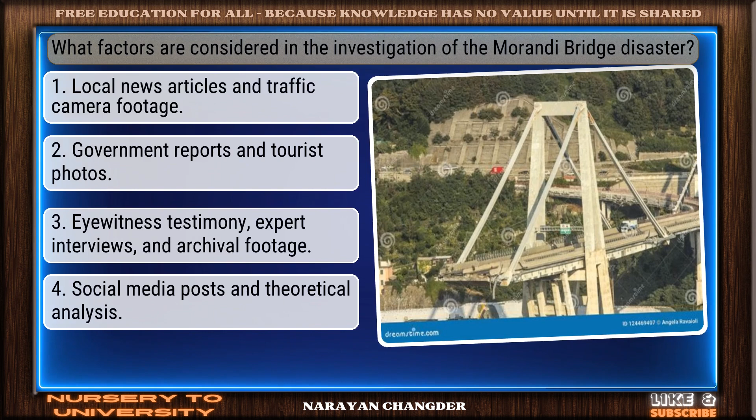What factors are considered in the investigation of the Morandi Bridge disaster? Valid point. Eyewitness testimony, expert interviews, and archival footage is true.

A structure built over something so people can cross. Smart move. Bridge is an accurate answer.

Which bridge is known for its ability to handle earthquakes due to its design? Solid response. Golden Gate Bridge is a valid choice.

How long had the Morandi Bridge withstood use before its collapse? Well picked. 50 years is the correct answer.

What kind of concrete was used in the design and build of the Morandi Bridge? Nice work. You chose prestressed and it is correct.

What is a common method for inspecting the structural integrity of a bridge? Excellent. Visual inspection is a brilliant choice.

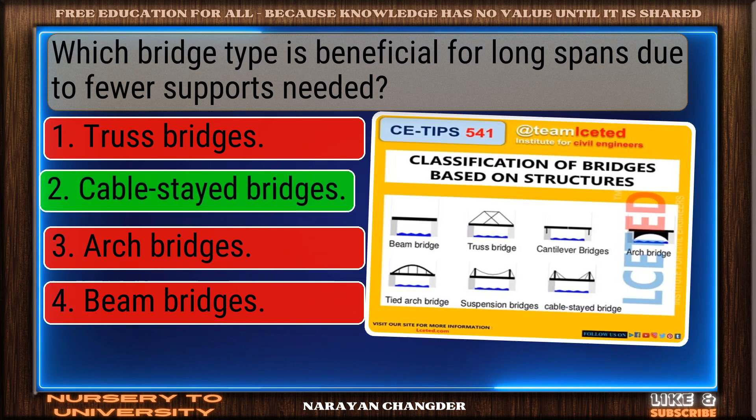Which bridge type is beneficial for long spans due to fewer supports needed? Great job. Cable-stayed bridges is the accurate answer.

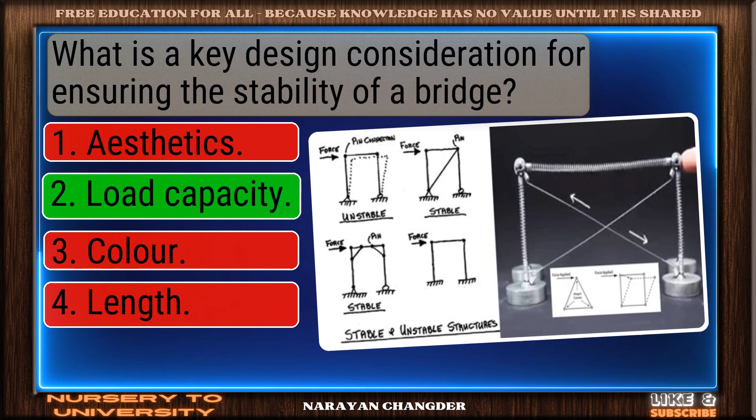What is a key design consideration for ensuring the stability of a bridge? You chose load capacity, and it is correct.

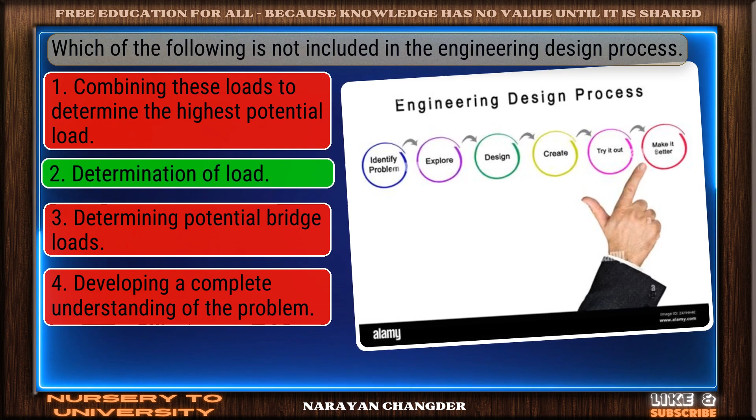Which of the following is not included in the engineering design process? Right choice. Determination of load is the best answer.

What is the primary role of a structural engineer in bridge construction? You got it, your choice. To specialize in designing structures that resist loads is right.

Which type of bridge is known for its simplicity and cost-effectiveness? Good job. Your answer, beam bridge, works well here.

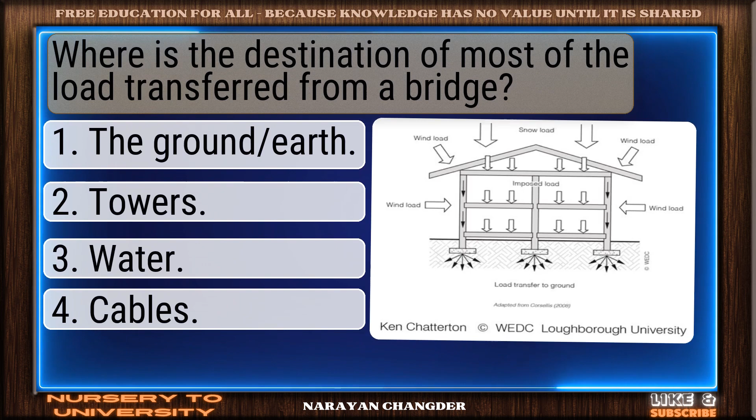Where is the destination of most of the load transferred from a bridge? Good thinking. The ground, earth, is the right answer.

Which bridge is known as a hybrid of suspension and cable-stayed types? Well done. Brooklyn Bridge is the right choice.

What makes the Golden Gate Bridge particularly suited to its location? You're right. Its ability to withstand earthquakes is the correct answer.

What is the strongest geometric shape according to bridge engineering? Right again. Triangle is a valid answer.

Why might an engineer recommend reducing the load a bridge can carry? Great thinking. To ensure safety is the right choice.

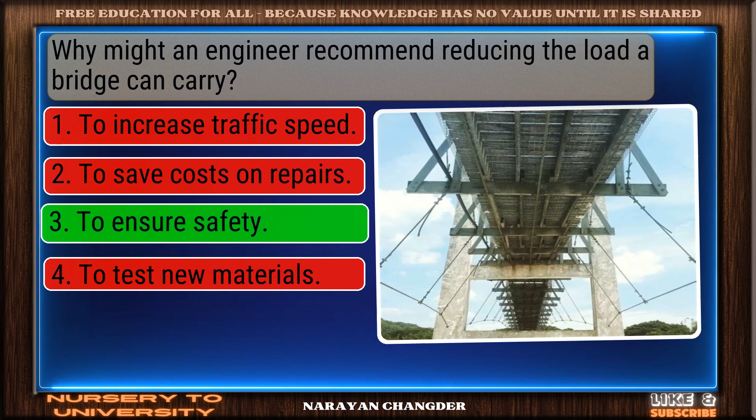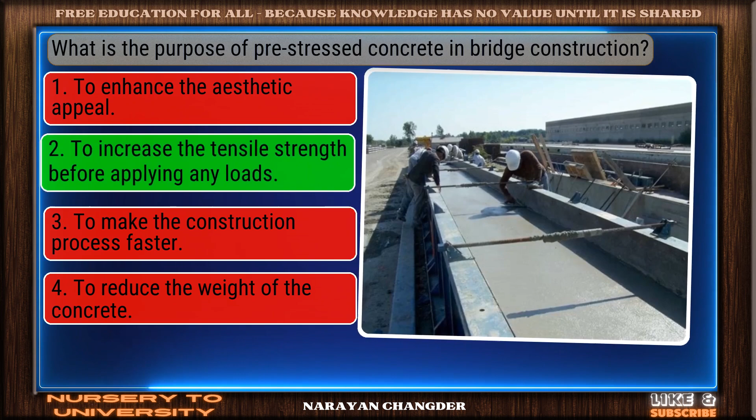What is the purpose of pre-stressed concrete in bridge construction? Bravo! To increase the tensile strength before applying any loads is the answer.

What is the title of the second video presented in the discussion? Correct. 'What Makes Bridges So Strong?'

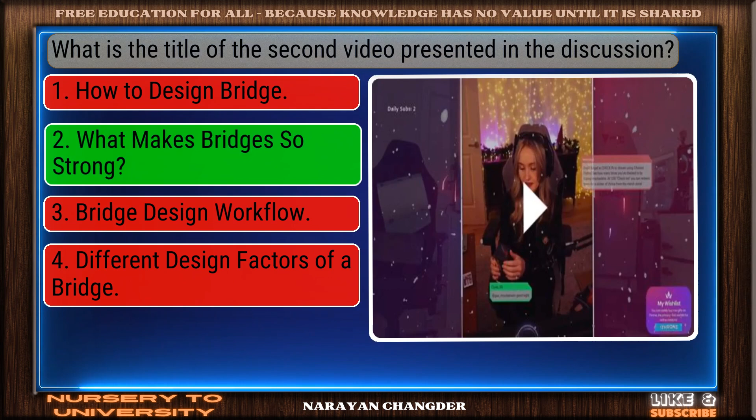What material is often used for the cables in a suspension bridge? Clear logic. Your choice, steel, is sound and 100% true.

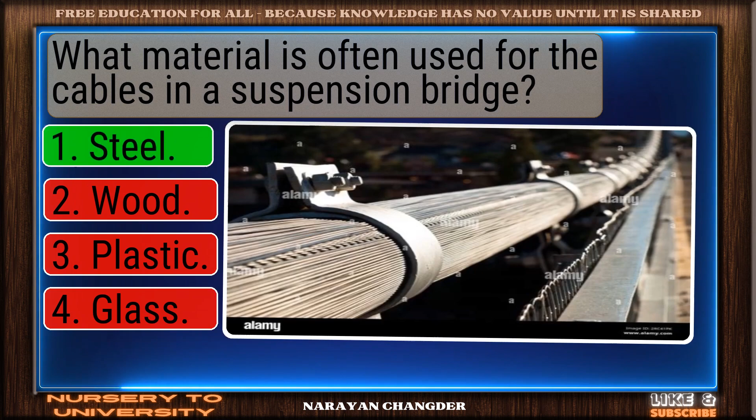To provide step-by-step procedures for the building of the bridge. Correct response. Construction design is the most accurate answer.

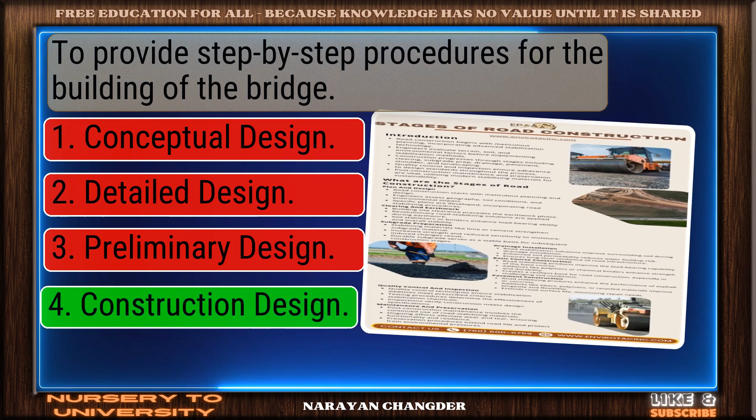Ratio of side span to main span in suspension bridge varies between what values? On track, 0.17 to 0.50 is the correct answer.

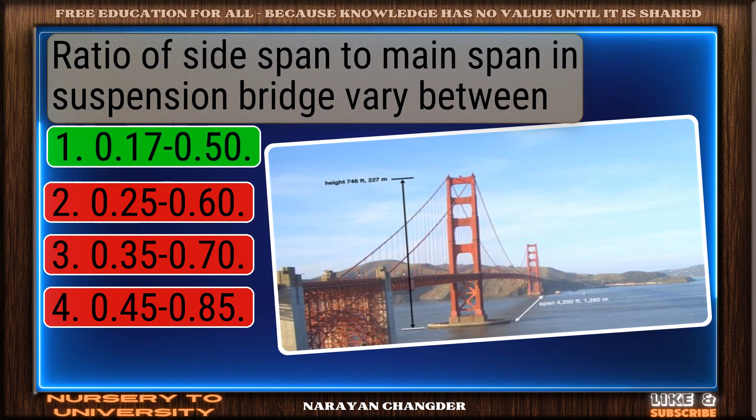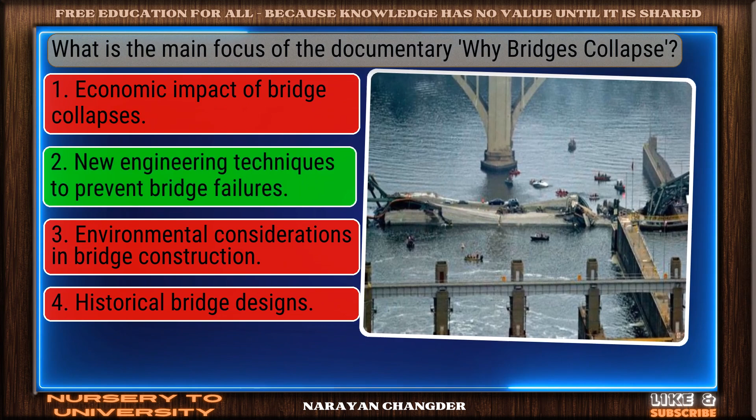What is the main focus of the documentary? Why bridges collapse. Well done. New engineering techniques to prevent bridge failures is the right choice.

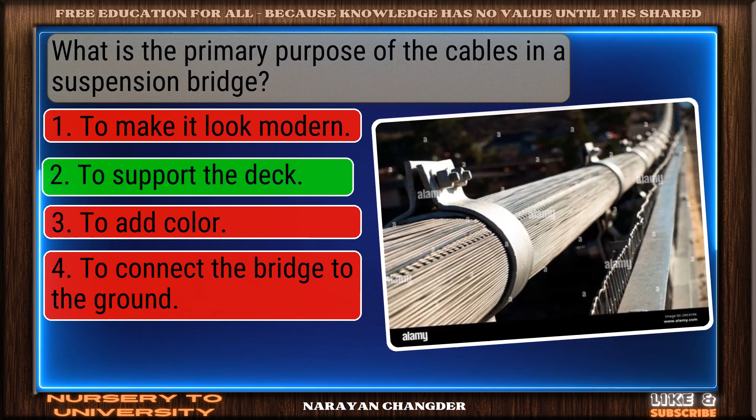What is the primary purpose of the cables in a suspension bridge? Great thinking. To support the deck is the right choice.

Which type of bridge has towers at either end that hold cables? Good thinking. Suspension bridge is the right answer.

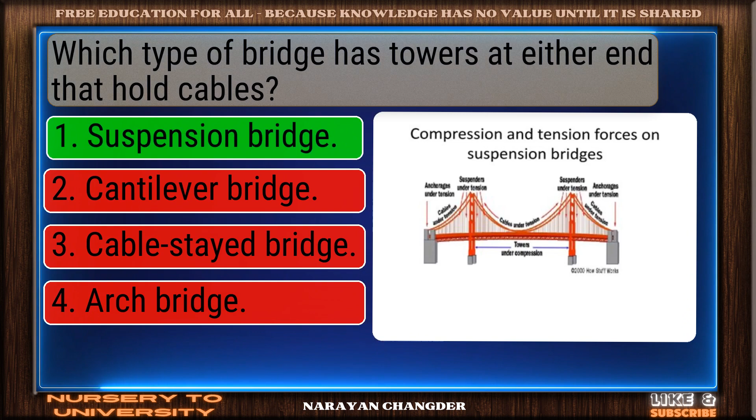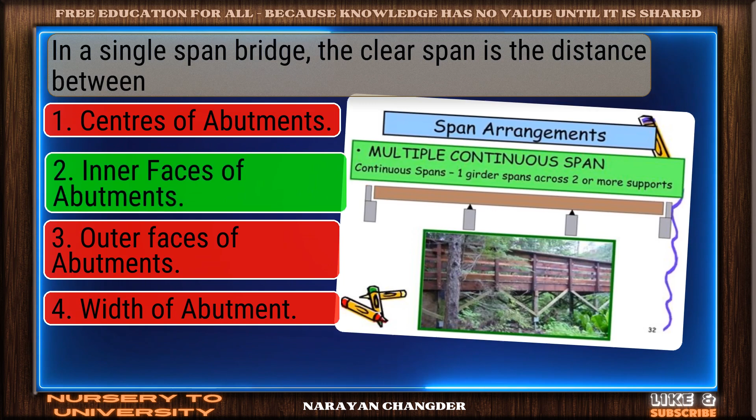Which force acts to pull materials apart in a bridge structure?

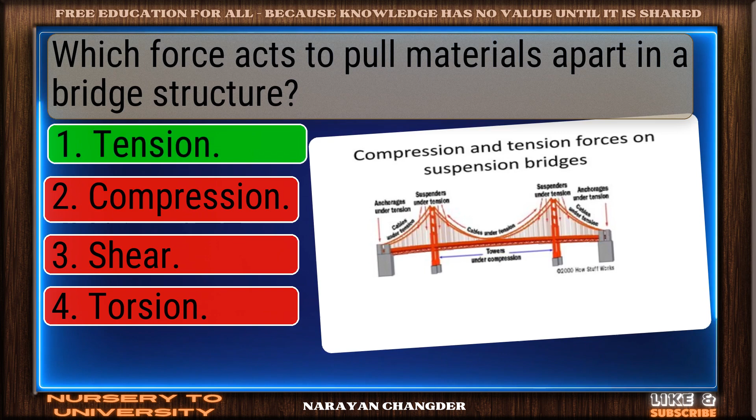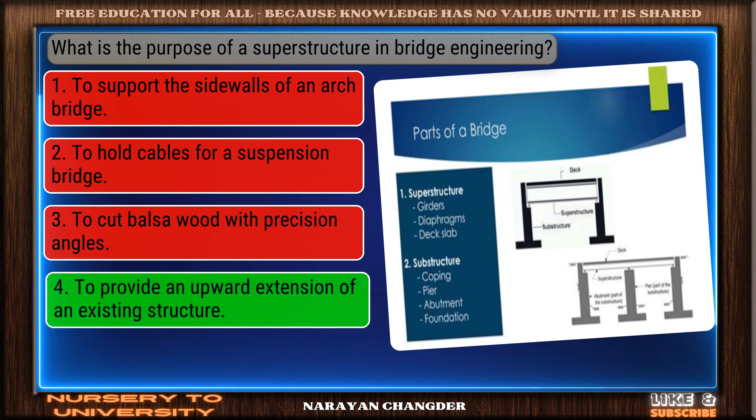What is the purpose of a superstructure in bridge engineering? Perfect, to provide an upward extension of an existing structure is the correct choice.

Which force acts horizontally and can cause a bridge to twist? Correct response, torsion is the most accurate answer.

What is the focus of the interactive feature? Build a bridge. Smart pick, educational simulation on bridge building is the correct choice.

Which type of beam distributes the load on a bridge the best? Solid response, diagonal is a valid choice.

What does pre-stressed concrete help prevent in bridge beams? Nicely done, excessive bending is a solid answer.

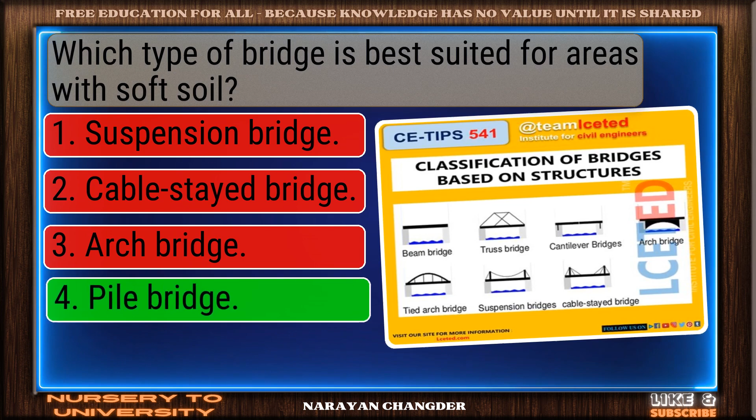Which type of bridge is best suited for areas with soft soil? Excellent choice, pile bridge is the right answer.

The planning of the Polcevera Bridge began in the early dash. Great job, 1960s is the accurate answer.

The Golden Gate Bridge is an example of what type of bridge? Correct, suspension is the right answer.

Which type of bridge is supported by abutments at each end? You chose beam bridge, and it is correct.

Which bridge is described as having a winking eye design? You got it. Your choice, Gateshead Millennium Bridge, is right.

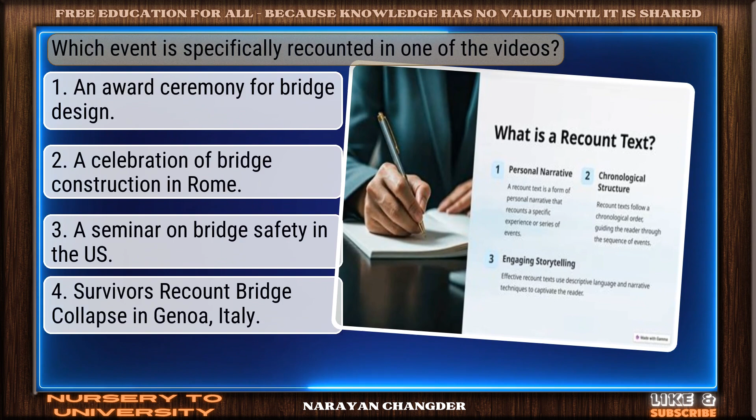Which event is specifically recounted in one of the videos? You're right, survivors recount bridge collapse in Genoa, Italy is the correct answer.

What is the part of the bridge above the roadbed called? Sharp thinking, superstructure is the right choice.

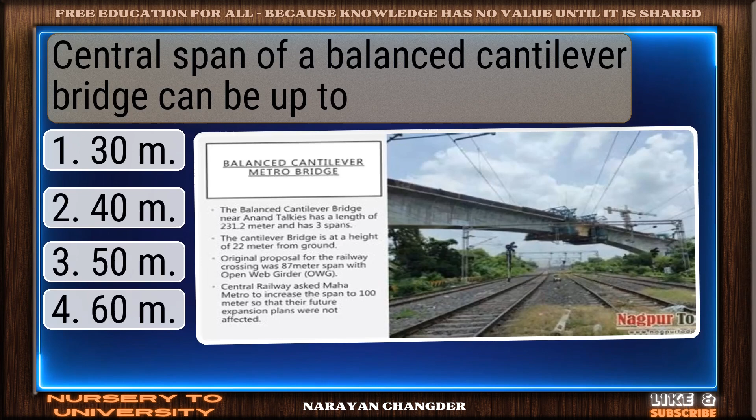The central span of a balanced cantilever bridge can be up to. Excellent, 30M is a brilliant choice.

Which bridge employs a truss design shaped like an arc? Smart move, Harbour Bridge is an accurate answer.

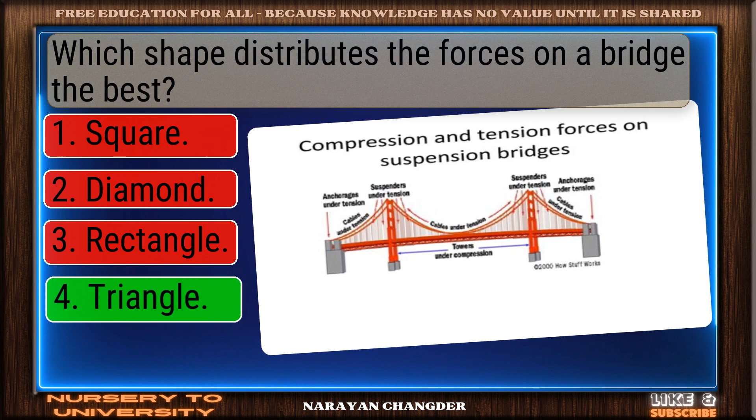Which shape distributes the forces on a bridge the best? Nice work, you chose triangle and it is correct.

Dash is the bridge floor directly carrying traffic loads. Right choice, deck is the best answer.

Which type of bridge is commonly used in railway tracks? Right again, truss bridge is a valid answer.

What type of force tries to stretch a bridge component? Well reasoned, tension is the correct choice.

The most common type of steel truss used for bridges. Exactly, Warren truss makes sense and it is the right choice.

Generally, which bridge type allows the longest span? On track, suspension is the correct answer.

What material is often used for the deck of a bridge? Clear logic, your choice, concrete, is sound and 100% true.

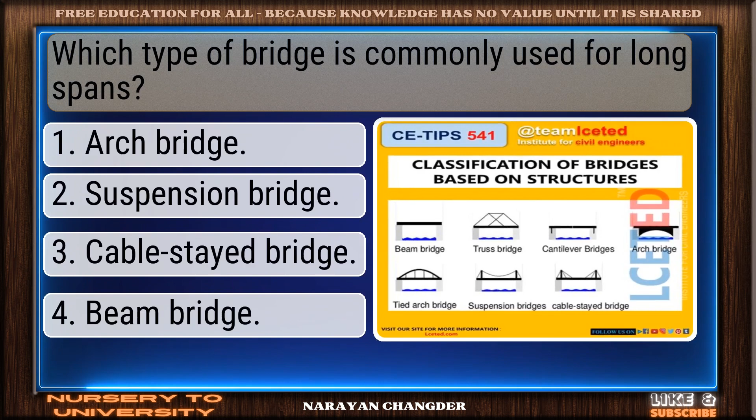Which type of bridge is commonly used for long spans? Nice selection, suspension bridge is the correct and valid answer.

Which type of bridge is most suitable for long spans? Good job, your answer, suspension bridge, works well here.

What is the environmental load in bridge engineering? Bravo, the effect of winds, snow, ice buildup, and earthquakes is the answer.

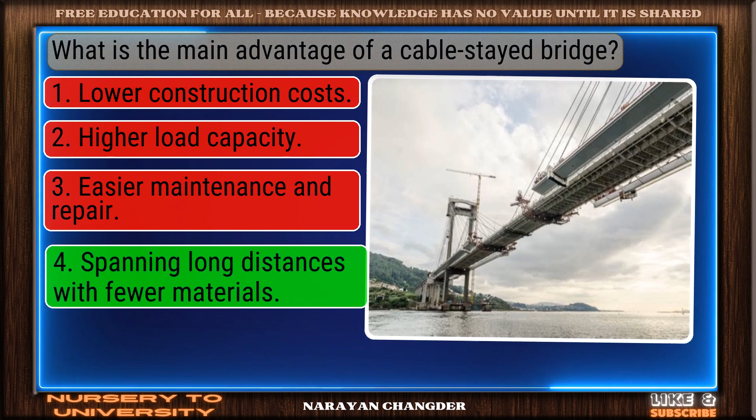What is the main advantage of a cable-stayed bridge? Good thinking, spanning long distances with fewer materials is the right answer.

Which may be the main span length of a major bridge? Well picked, 90M is the correct answer.

Which force tries to stretch the bridge components? You got it, your choice, tension, is right.

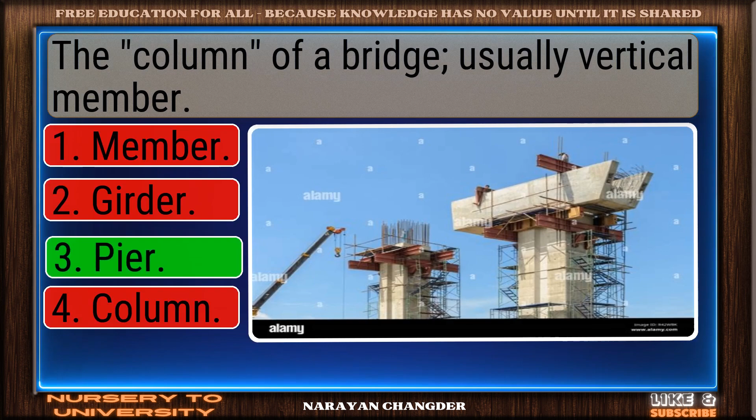The column of a bridge, usually a vertical member. Nicely done, pier is a solid answer.

What is an important aspect of bridge maintenance? Excellent choice, regular inspection is the right answer.

A truss bridge is made up of which type of shape? Strong choice, triangles is the right answer.

Which type of bridge is known for its arch shape? Solid response, arch bridge is a valid choice.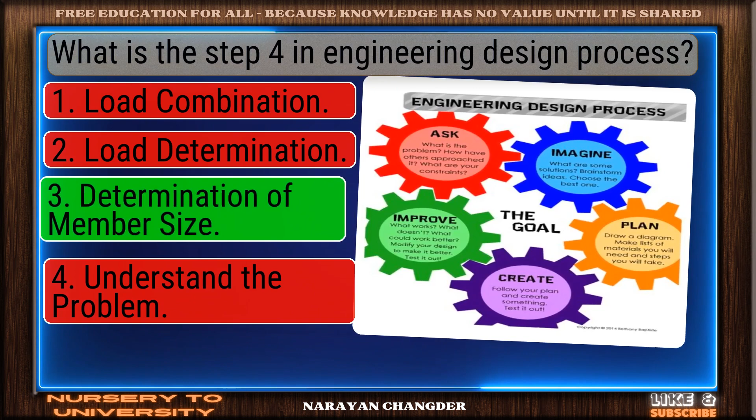What is step 4 in the engineering design process? Right choice, determination of member size is the best answer.

Which force primarily acts downward on a bridge? Well done, gravity is the right choice.

What happens on the day of the bridge opening? Sharp thinking, Robert's family has a party is the right choice.

Which of the following is a type of bridge? Great job, all of the above is the accurate answer.

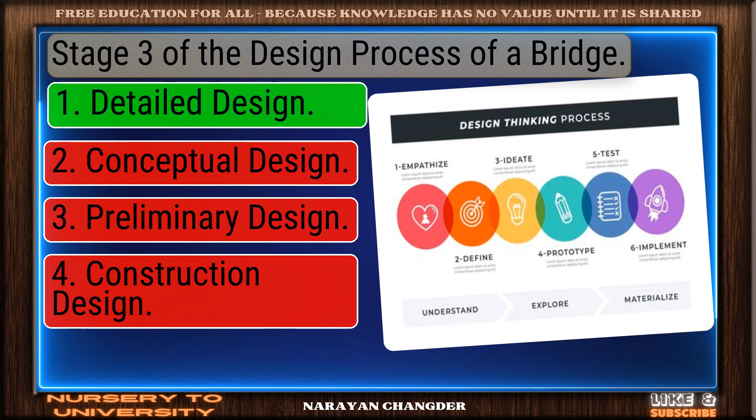Stage 3 of the design process of a bridge. You're right, detailed design is the correct answer.

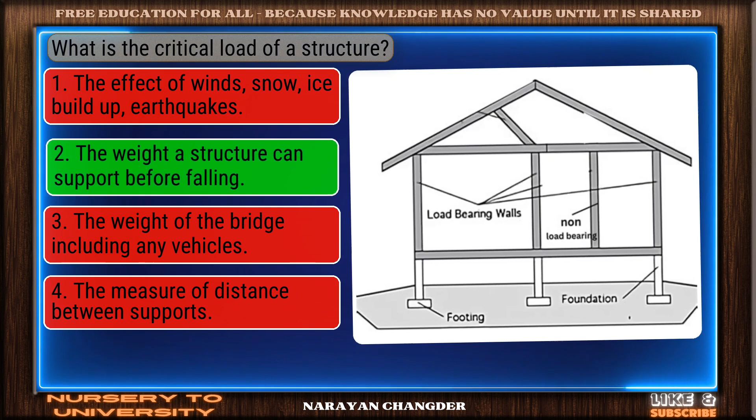What is the critical load of a structure? Smart move, the weight a structure can support before falling is an accurate answer.

The distance between bridge supports. Correct response, span is the most accurate answer.

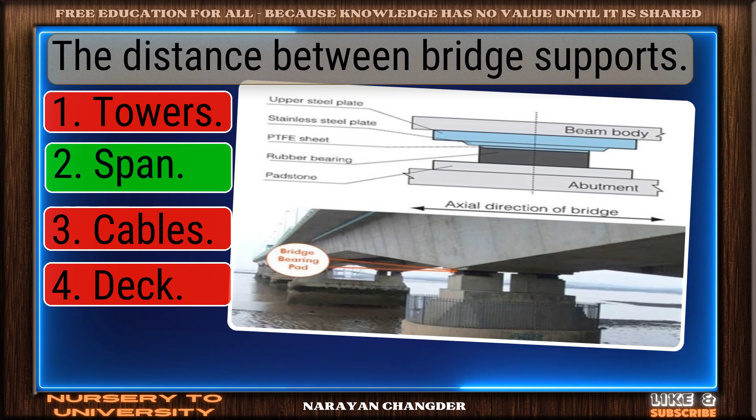What is the main purpose of a bridge? Good job, your answer, to provide a crossing over an obstacle, works well here.

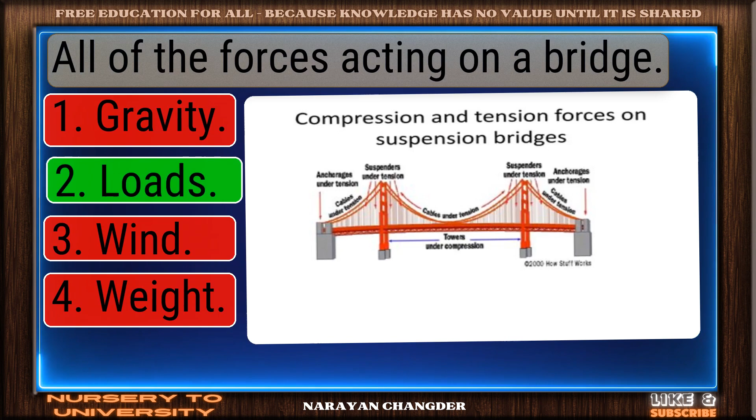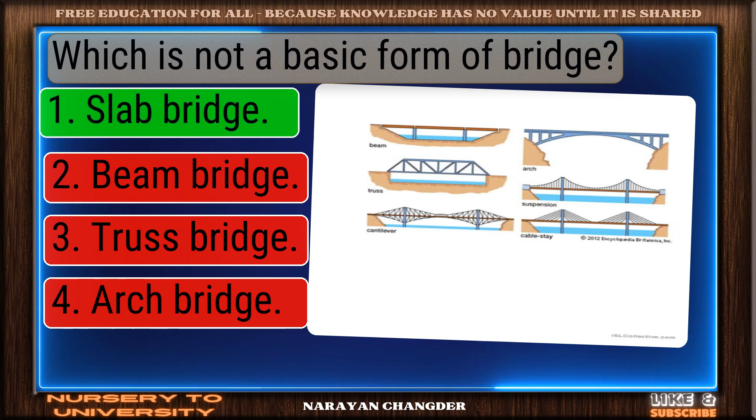Exactly, slab bridge makes sense and it is the right choice.

What does Robert hide in his room? Nice work, you chose a puzzle piece and it is correct.

How are Charlie and Robert alike? Bravo, they both watch the bridge go up, is the answer.

What is engineering design? Well reasoned, steps that engineers use in creating products is the correct choice.